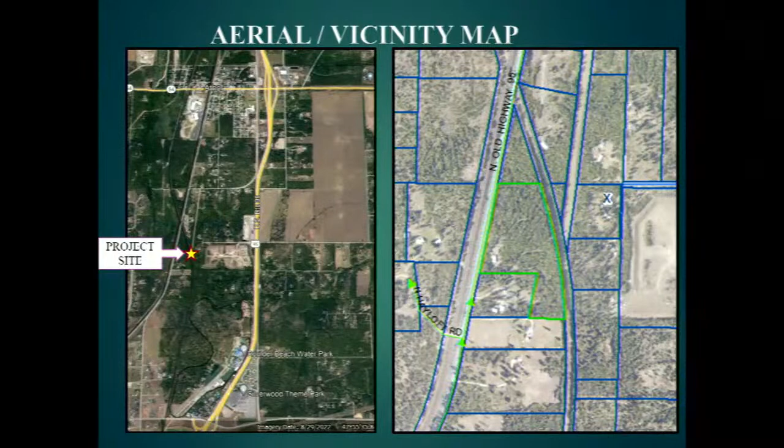The project site is located on Old Highway 95, south of the city of Athol and northwest of the Silverwood Theme Park area. The zoning for the parcel is rural.

To establish a mini storage facility, you have to have a conditional use permit, which is why we're here today. But as you can see from the zoning map, this parcel is within close proximity to commercially zoned property. That area is actually owned by Silverwood Incorporated, but also located just east of the parcel, there's a 72-acre parcel. Kootenai County did issue a conditional use permit for a log home manufacturing facility, which is still in operation today.

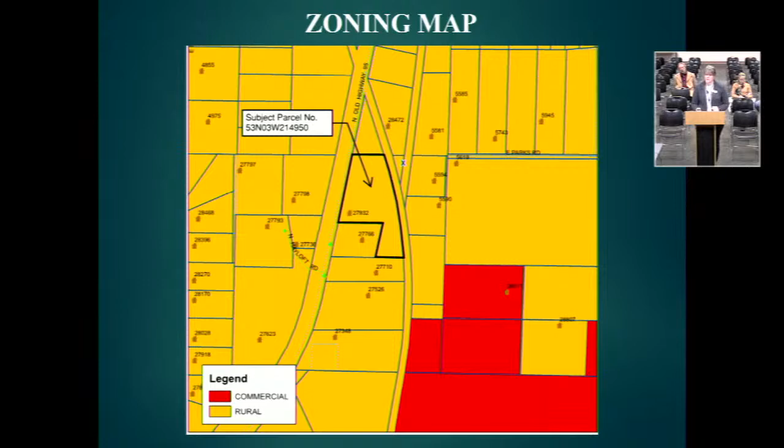We do rely on them to tell us any issues they might have within the ACI and our transitional zone.

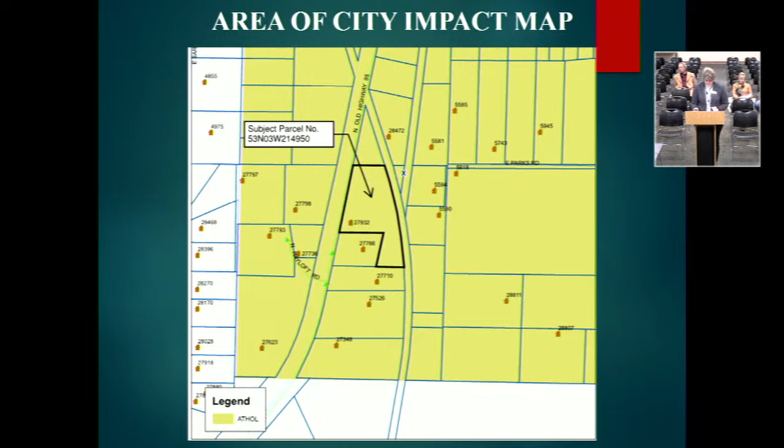The subject parcel is developed with a driveway off Old Highway 95 and has a 30 by 60 foot pole structure. As you can see from the aerial maps and photos provided by the applicant, it's heavily vegetated with mature vegetation, specifically evergreens. A viewpoint from Old Highway 95 gives you an idea of the vegetation along the road frontage.

The overall proposal is for 16 storage unit buildings divided into 468 individual storage units. They also have an area for open storage for recreational vehicles and boats, which is allowed through the mini storage facility process. There's a breakdown table included on the site plan that gives you the size of these different storage units, the quantity, and the total square footage.

And they're showing 171,730 square feet of building area. It is expected or proposed at this time to be an unmanned facility, so no office building, no restrooms, no water or wells at this time.

They are proposing security measures, not just fencing, but lighting, cameras, and an entry-exit gate. Customers will have to reserve units online and will be given a passcode to enter the facility.

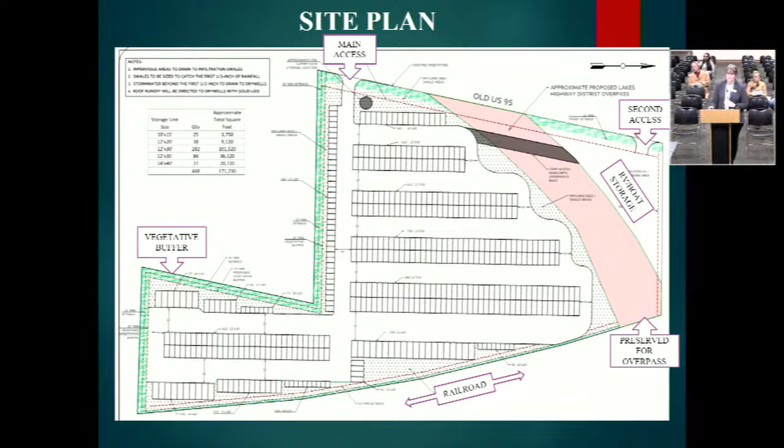Here's an overall summary of the comments we received from agencies. Two I want to focus on are Lakes Highway District and the Timberlake Fire District requirements. In addition to that overpass, I have a slide showing what Lakes has given us, but Lakes will also require trip generation and distribution analysis at time of permit review, to understand the commercial approach they might permit onto Old Highway 95.

For the fire district, as stated previously, there will be no well, domestic water, or wastewater like septic and drain fields, but we do need to worry about fire suppression. The fire district will require a water system, specifically in the form of a pond, with a minimum of 60,000 gallons and all infrastructure like a fire pump and hydrants. They will review this in more detail once they have a set of building plans with the permit.

Our own building code also has fire suppression measures. They require sprinklers for a 12,000 square foot structure, but there's an alternative with firewalls, and this is from one of our building officials who helped with these options. Of course, the owner is responsible for keeping the pond full winter and summer, per the fire district, and the applicant has proposed that water be trucked in.

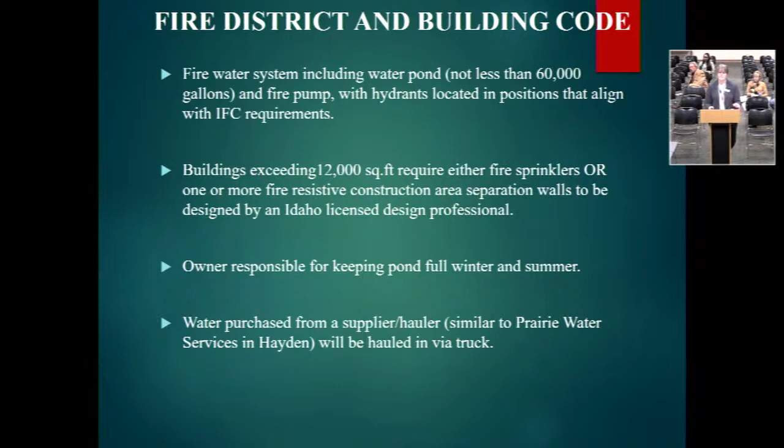Here, we did a public records request with Lakes Highway District, and this is what they gave us. Again, north is to your right.

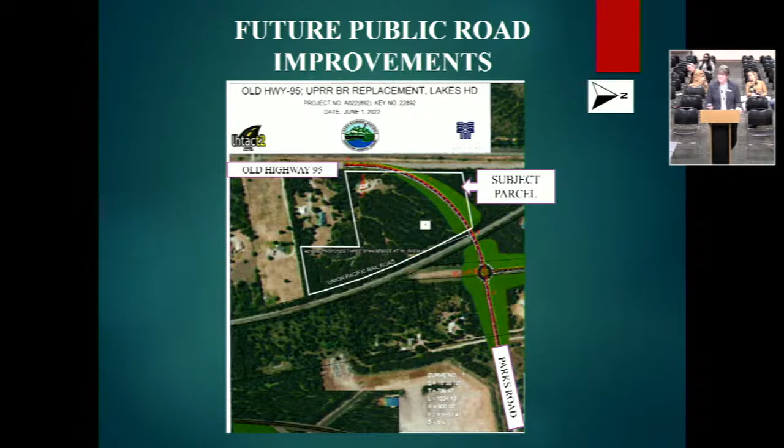They're trying to connect Parks Road directly to Old Highway 95. So we don't really know the full design yet.

During the public comment period, we received 5 comments, and I just checked before coming to this meeting, it's still at 5. They had concerns over increased traffic on Old Highway 95, compatibility with the neighborhood, questions if this is appropriate zoning, security, and the overpass.

Through our staff analysis, we feel that all the performance standards specifically for a mini storage facility have been met. The applicant has offered more security measures, which is always a good thing. Hours of operation help with security as well. I would say hours of operation may even help with the traffic, since it's not a 24-hour operation.

We will require that the fire system be installed prior to the first certificate of occupancy on site, and there's the secondary access I already spoke about. We will enforce our landscaping requirements, and we will also require that a design professional plan be submitted for the site disturbance permit. It's actually required for all our commercial uses, and that will also help with stormwater, runoff, and planning for dust, best management practices. That is all captured in the site disturbance permit.

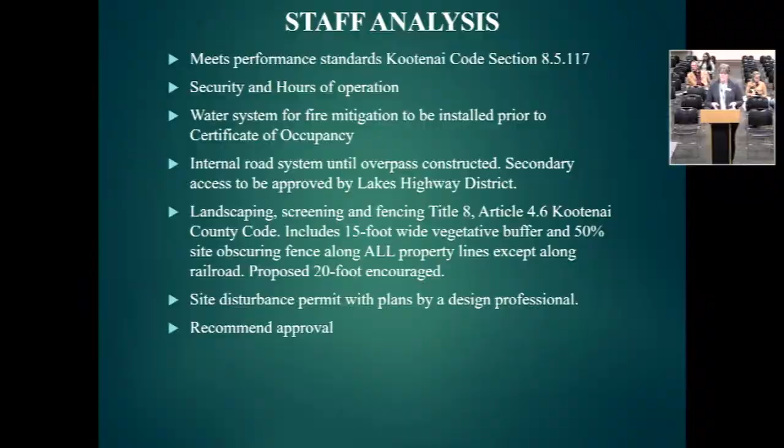As far as compatibility, it is located on a public road and in close proximity to commercially zoned property as well as commercial use. So we do feel it is compatible with this area, and landscaping will aid where it borders residential properties. So staff's opinion is that we are recommending approval. I stand for any questions you have.

Thank you for your presentation.

There's a couple areas I want to drill down a little deeper to get some more thorough information for our record. First, maybe you could back up a few slides—this has to do with the roads and approaches. If we go back a couple more, so I get the terminology right for our record... okay, that might be too far. Okay, I just want you to describe a little more about the process for them to receive their approach permit, doing the trip generation analysis, or that requirement imposed upon them.

Sure, I'll speak from the stance of where we come into play. Old Highway 95 is within the maintenance jurisdiction of Lakes Highway District. They are the ones who issue that approach permit, and they base it on the trip generation analysis that they receive. We include them at the time of both the site disturbance permit and building permit, and we won't issue those until the Highway District has signed off. I guess that's the best I can answer, as that is our role for any approach permits.

Okay, so one of the requirements—maybe we can skip to it... I think it's after this. Keep going, I wonder if it's forward—here, that one: overpass and trip generation distribution analysis. So again, so we have a thorough record, and especially for members of the public who are quite reasonably concerned about the increased traffic on this pretty narrow, not wide shoulder road, what that might mean for this project.

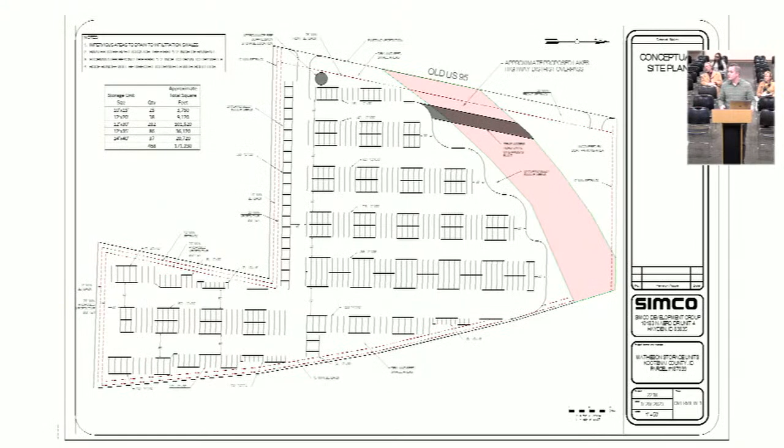So just starting with the general layout and design, this is our initial proposal. We're expecting 171,230 square feet of total floor space. However, this is a conceptual site plan, and we would love to have a little bit of flexibility depending on the final design, which of course will fully comply with all building codes. Amy explained that at the time of building permits there is flexibility for minor modifications to both the design and total square footage of those buildings, as long as it meets all necessary and required codes, which we'll do. We do also intend to build this in a phased development.

There are a couple reasons for that. One is the overpass, the public works project that will come through the middle of our property. One of the Lakes Highway District's comments was that they wish to continue working hand in hand, our engineer with theirs, so we can make sure the two projects are compatible, which we intend to do. So we intend to develop the areas away from that overpass first, giving some leeway in case final designs change, because we want to be good stewards of that land and allow them the necessary space they need.

We believe that public works project will be a great asset to this area, connecting roads that were previously tough to get to. We also believe that project makes the site location ideal for development. It will have a major overpass running right through the property, increasing frontage and view of that property. If I were a homeowner with a home right in the middle of that property, I wouldn't necessarily want to look at a 30-foot overpass in my backyard. So we felt like this was a very appropriate use of that land.

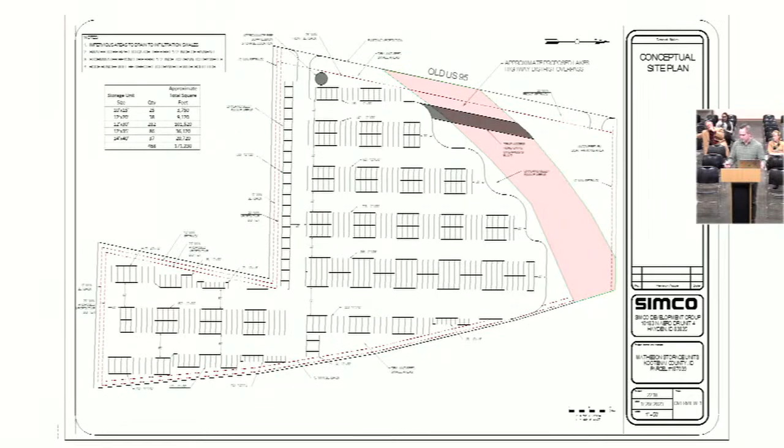Lastly, I wanted to comment just briefly on the Public Works project. This is essentially our site plan overlaid over the top of the proposed overpass. That overpass essentially cuts the property, I wouldn't say in half, of course, but goes right through a significant portion of the property. Again, I feel like that bodes well to allowing this property to be developed in this manner, in harmony with the Lakes overpass.

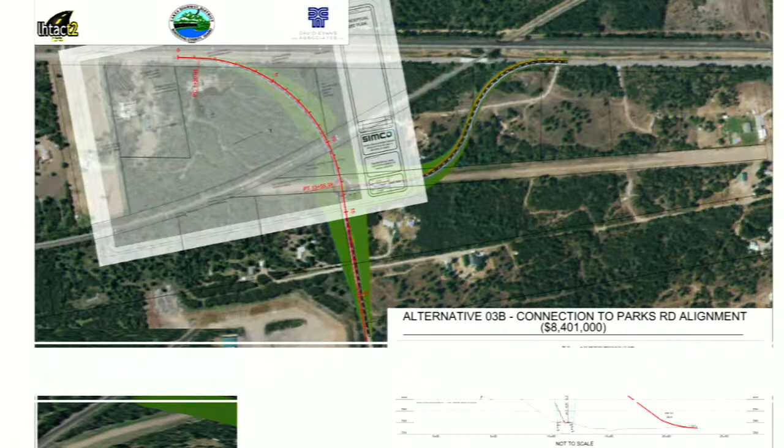Scott, would you like me to address anything else? Okay, thank you, Mr. Zemi. Right, yeah, just a couple questions for you. Of course. So, and actually, I missed your name. Are you Mr. Matheson? I am. I'm Jason. Okay.

Perhaps more out of curiosity, but as far as the Lakes Highway District's intended overpass, I didn't notice that there is an existing easement. Is this their intention to exercise eminent domain or acquire this portion of your property? Correct. According to the director, that is what their intention is, to use eminent domain to purchase that section of property.

I did see in the existing record, prior communications between you and them, that this is something you've known about for a while and obviously are planning around now. Correct. Yeah, we found out about this back in, I forget the exact date, probably May, I believe, was when we were first informed of the Public Works project. Okay. So our engineering team has been intending to be good neighbors with them and work in concert with them.